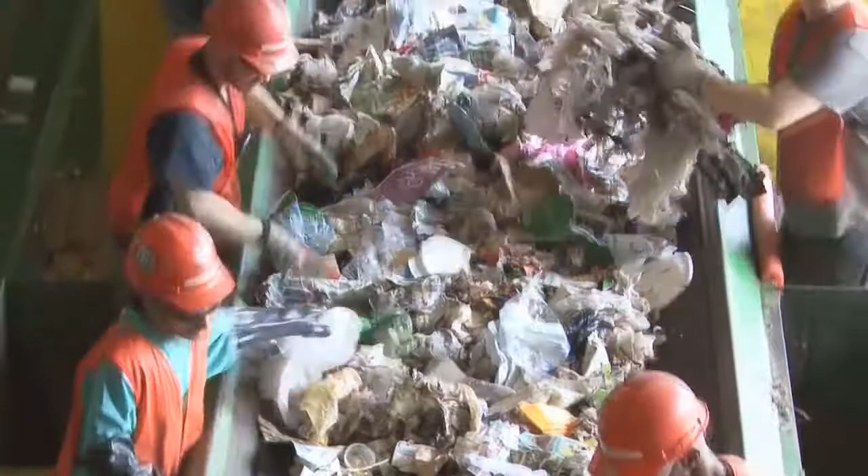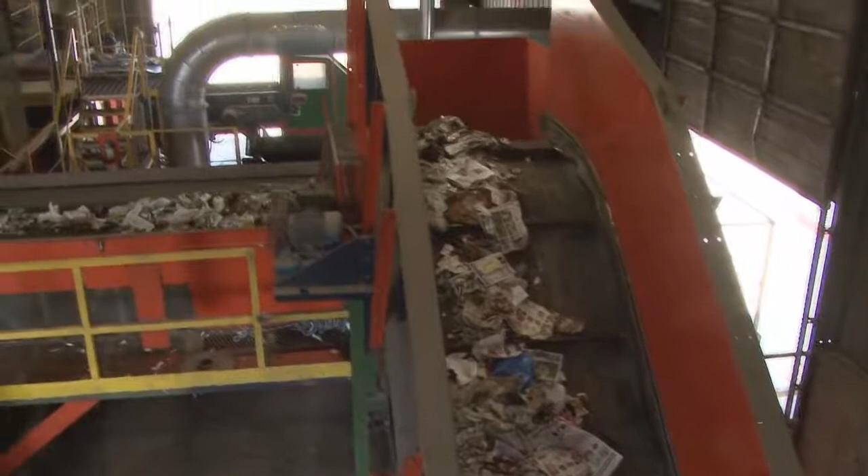The harvesting process begins at the bag shredder, where bags are broken open to expose the potential recyclables inside. In stark contrast to a landfill, the materials don't just sit there, they move. The contents of the bags are quickly moved to the pre-sort line. While traveling down the pre-sort belt, the contents are combed for non-recyclables that may have been contained in the bags, while some employees are tasked to look for obvious recyclables that are dropped into the bins below. The now combed material moves up a conveyor belt to a secondary pre-sort line. On the second pre-sort line, materials are once again looked over for any non-recyclables as well as anything that might damage the machine, such as garden hoses or electric cords.

From here, it enters the trommel. The trommel serves several purposes, including breaking up any large material or bags that have made it this far in the process. And more importantly, this is where smaller fine material and organics are separated from the batch. The smaller materials fall through the small grates in the trommel. The recyclables move onward and upward to the next phase of the process, the cardboard separator. The heavier and larger cardboard is pulled up. The large gaps allow smaller paper, plastic, metal, and glass to fall through to another conveyor belt. The glass, plastic, and metal move on, while the large majority of paper is separated and sent to bale at this fiber screener, which uses an innovative blowing process.

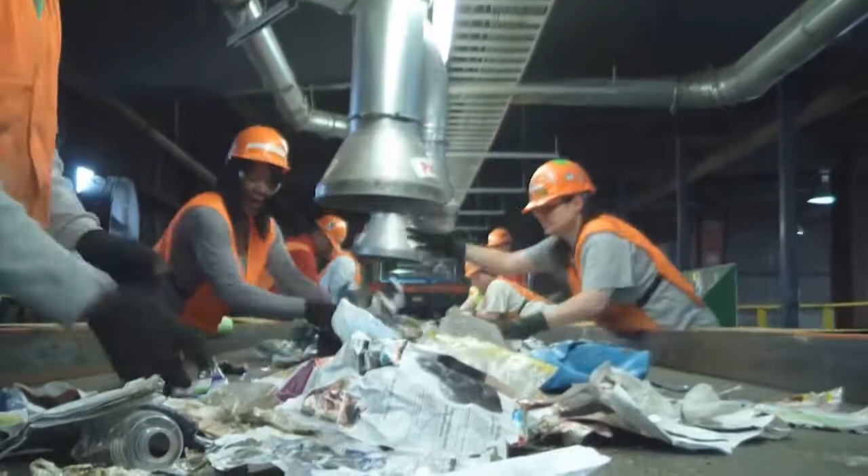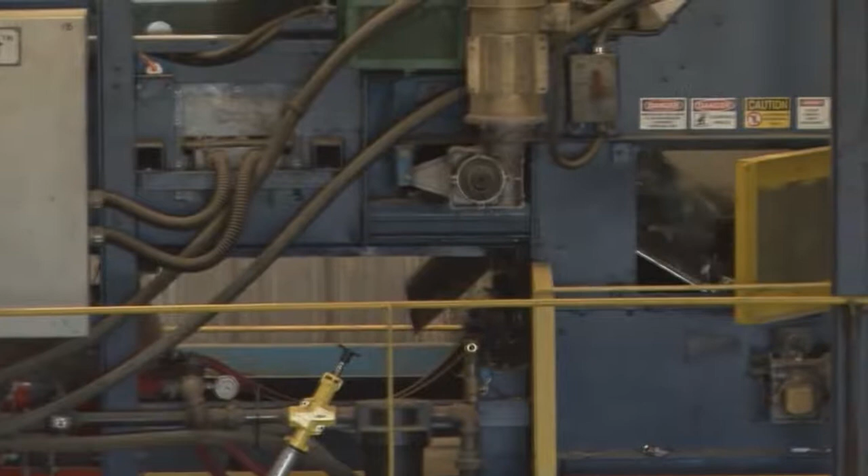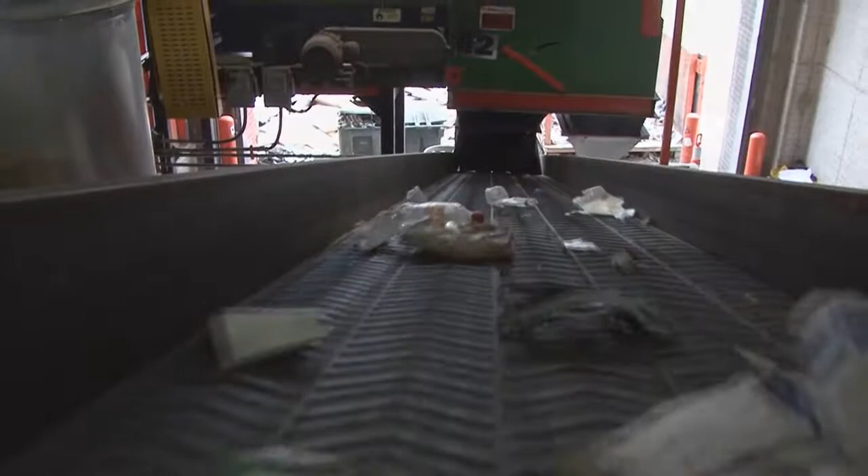The remaining recyclables move up yet another conveyor belt to the sort line. During the first phase of the sort line, plastic bags and paper products are hand separated and placed into vacuum tubes. This complex yet simple vacuum system allows all the materials to end up in their rightful bin. Next comes the ferrous metal magnet. Ferrous metals, or magnetic metals like iron and tin, are separated from the batch in a blink of an eye. The remaining materials move up a small conveyor belt to an optical sorter. This amazing machine within the machine recognizes different types of plastic and separates them at lightning speed. Now all we have left is the aluminum and a little residual. Aluminum is separated by the eddy current machine. This machine makes the aluminum essentially hop over into its proper bin, while the residuals fall onto another conveyor belt to go back through the process once again.

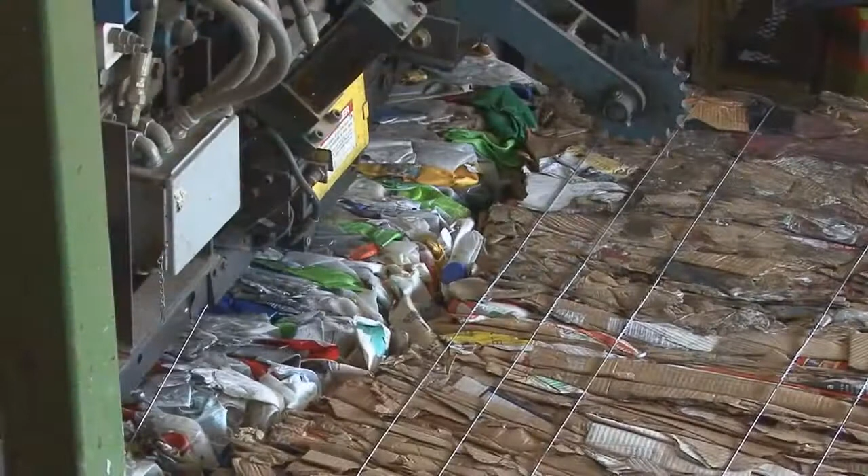So what happens to these materials once separated? When a bin is filled to capacity, such as this plastic bin, the bin is emptied and transported down the line via a large conveyor belt. The contents are moved to the baler, where they are compacted and baled. The entire bin of plastic that would have otherwise ended up in a landfill is now condensed to a relatively small bale. The bales are loaded for transport and sent to the appropriate facility to be repurposed.

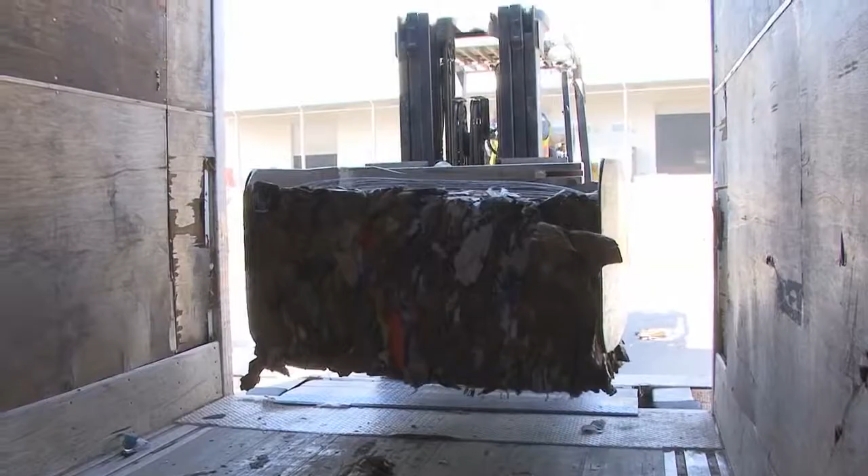The facility is equally proficient at separating both mixed waste and source-separated recyclables, and takes in tons of recyclables that may have otherwise ended up in the landfill. All of this to make the world just a little better place for our future.

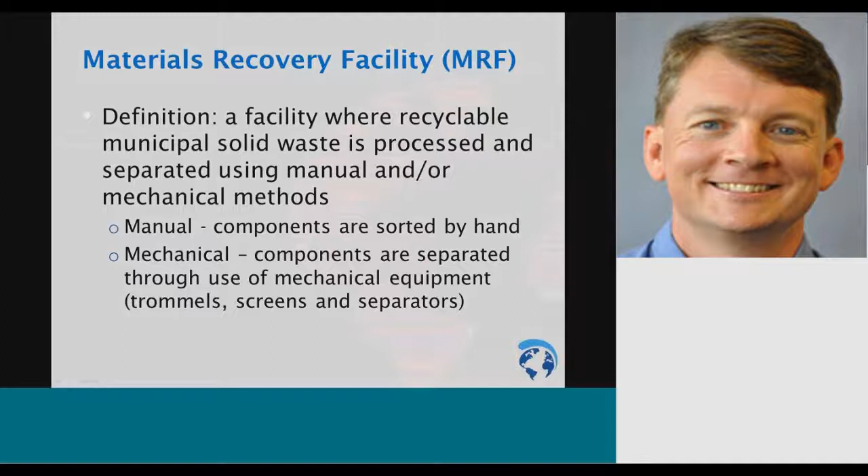The key with manual sorting is that you're trying to pull out the materials that are the easiest to get out. So you're looking for things in that material stream that are not as common. So you're pulling out the smallest number of things, and the largest number of things stay moving through the sort.

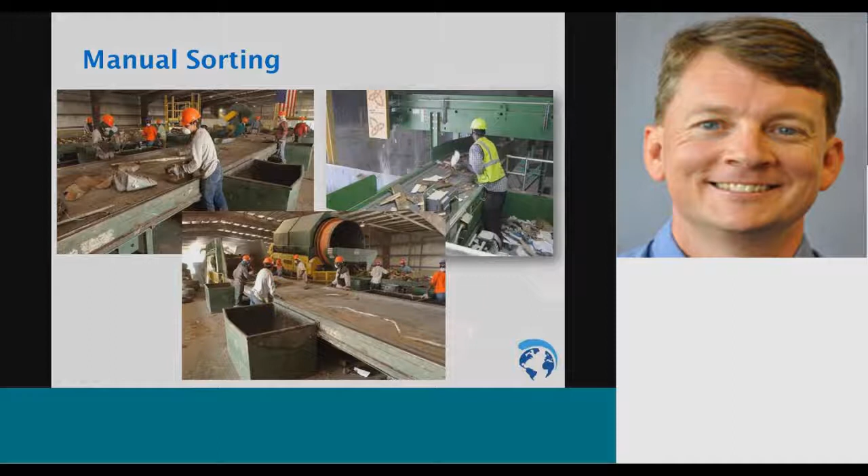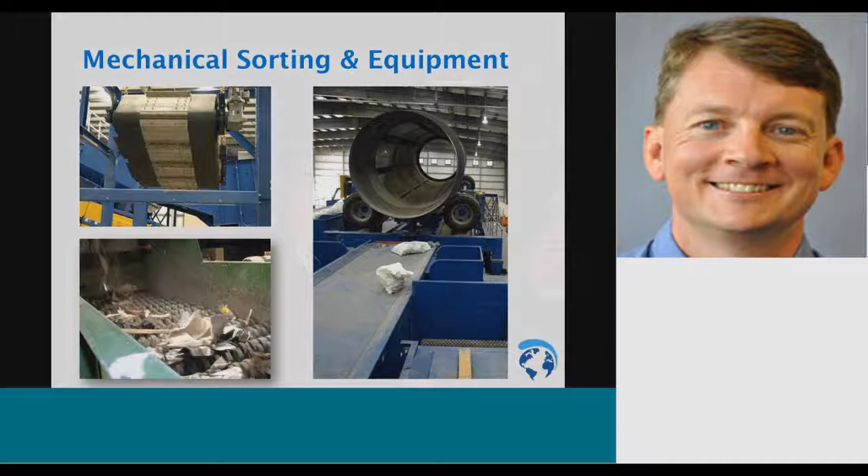And off to the right, we have a trommel, which spins, you can see by the wheels there, it spins the material through it. It has a screen set in it, and it will separate materials by their size. It also helps to open things like bags by tearing them and moving materials around to separate them so that they're easier to pick in subsequent steps through the sorting process.

So MRFs are generally defined as two separate classifications. First is a clean MRF. A clean MRF is commonly used in communities where there's already a high degree of segregation occurring right at the source where materials are being generated. So that's in people's households, in their places of business, at schools, at markets, grocery stores, those types of places where the waste materials are being generated. We're then doing source separation at that location.

In clean MRFs as well, we're typically separately targeting biodegradables versus non-biodegradables, and hopefully those are being separated out in the very beginning of that process. Biodegradables can contaminate the non-biodegradable waste stream, material stream, so we're looking to try and get that segregated out as early as possible in the process, the solid waste management process.

Contrary to clean MRFs, we've got dirty MRFs. In a dirty MRF, nothing is separated at the very beginning of that process. Everything comes together. People throw everything into one bin. All the trash, all recyclables, all go into one bin. It all gets stored in a trash can, is all collected together, and goes to a facility where then the segregation occurs.

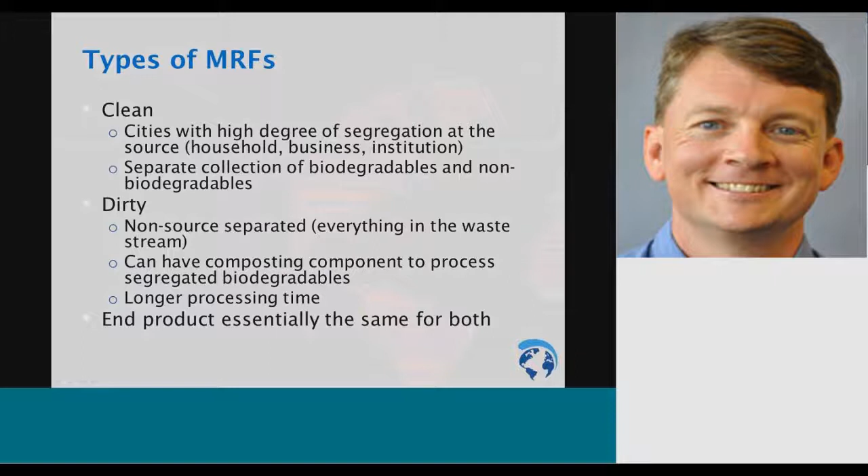So when we're looking to develop our MRF, we've got to find a site for it. So I'm going to talk through some of the siting criteria that we look at when considering the right place to locate a MRF. Certainly, we're building a facility of some sort, where the size may vary depending on the amount of material that we're going to send through it. But generally speaking, for the convenience and the efficiency of moving materials in and out of a facility, it needs to be close to existing roads.

But certain roads are not necessarily compatible with the types of vehicles that will be entering and exiting our MRF. So we're going to want to check on the impacts to existing traffic surrounding the potential location for this facility. Waste trucks bringing materials to this facility are relatively large trucks, 30, 40 feet in length, 10 meters. And waste vehicles and tractor trailers that are taking baled materials and the residuals away from this facility are double that size. So having those large vehicles driving around in, for example, residential areas where small kids are playing and there are schools is not necessarily compatible.

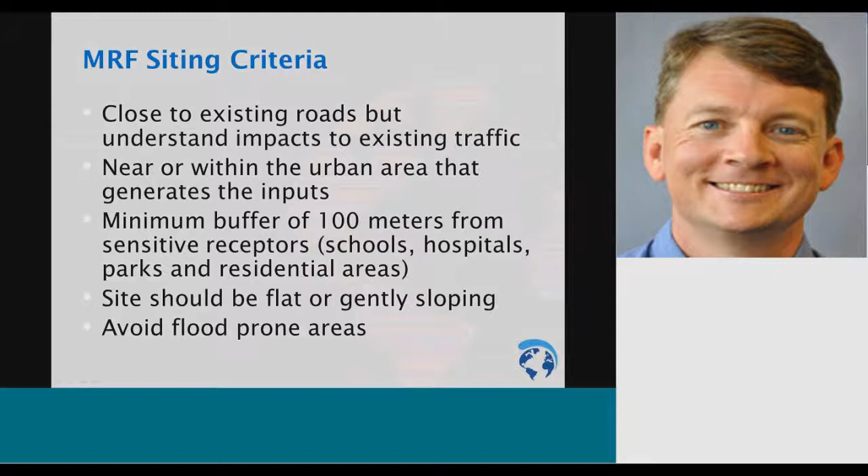So as we're looking to now get into the planning stages beyond just finding a good site, we need to figure out how are we going to design this facility? How are we going to size this facility? And the first step in this overall process is really understanding the nature of the materials that we're going to be dealing with. Where is this material going to be coming from that we plan to be managing and to be separating?

Industrial type facilities, you're going to have more packaging materials. So we may see more plastic wrap, plastic materials showing up in our waste stream, cardboard boxes there as well. And hotels and restaurants, well, we're going to have large plastic bottles and tin cans. Food is typically purchased in large bulk type sizes, so we get large amounts of materials that hold that food. And of course, we're also going to have food waste as well.

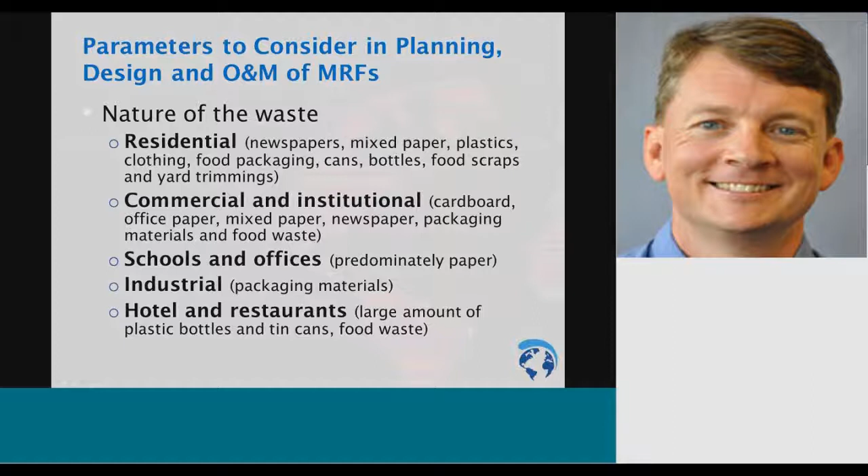So really understanding that waste stream, that generation of waste, where it's coming from, what types of materials, is really important. And so we certainly recommend performing a waste composition study. And the key to a waste composition study is what's termed here as end of pipe waste characterization. We're looking for the amount, the characterization of the waste that gets collected and would be delivered to a materials recovery facility. And we do an evaluation of that waste to find out how much and what types of materials are in that waste stream and are able to be processed, able to be separated from that waste stream and stored and subsequently sent on to recycling markets.

What will come out of all that as well is there's going to be a certain amount of materials that you're going to be able to pull out of that waste stream, but there's a certain amount of materials that you're not going to be able to do anything with. Either the markets don't exist to manage it, or it's contaminated, or it's a material that you just can't do anything with. Those are what are termed as the residuals. And you're going to have to manage those materials as well. Those are going to have to go off to a waste incinerator or go off to a landfill ultimately at the end of your process. So you need to understand the full circle of that waste stream and how it gets managed.

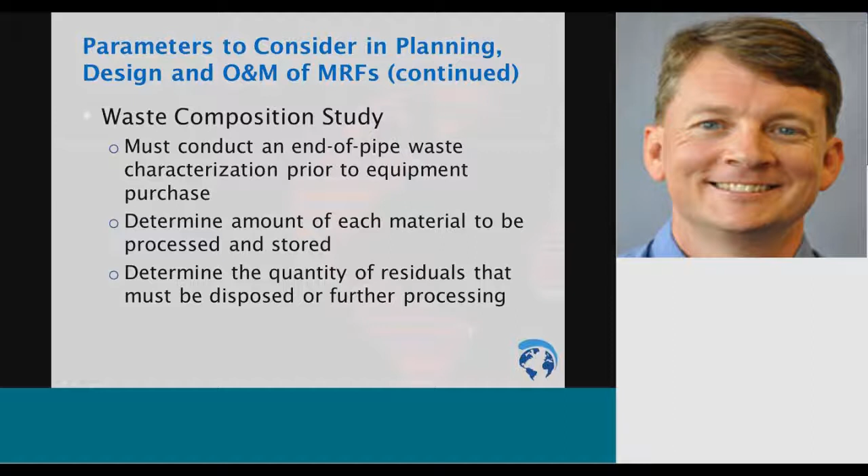If there's construction and demolition debris that you're going to decide to target after, well, the technologies may change on the separation and the labor force that you might use to be able to pull those type of materials out. We've got different concerns with construction and demolition debris.

In the video that I mentioned, the MRF facility was handling municipal solid waste, and they did reference that they had a second facility on that same property. And that second facility actually is a whole separate construction and demolition debris recovery facility.

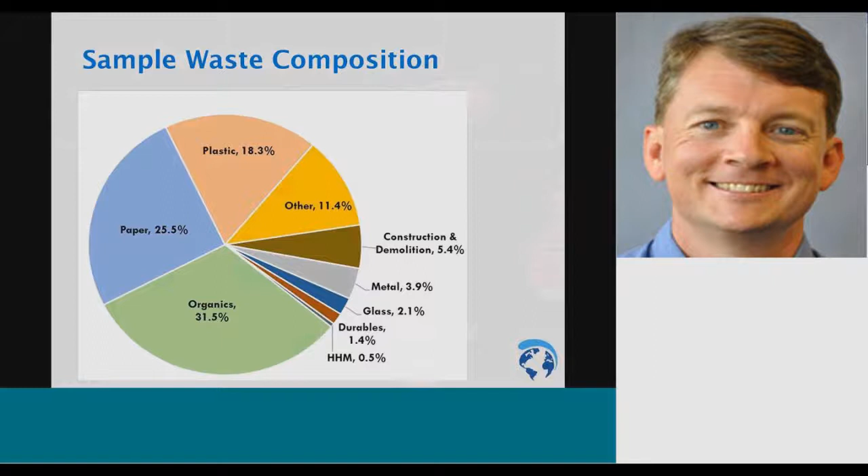So once we look at our waste composition, we understand what types of materials and how many materials are in that waste stream. We then go back into looking at the area that's going to be potentially serviced in a location where we place our materials recovery facility. We go back to what is the waste generation? How much waste can be generated to serve as the source of these recyclables?

If we're going to expect to get 10 tons per day of materials, then our facility will be sized accordingly. If it's going to be less, it may change the technologies that we use, and if it's more, it may significantly change the technologies that we use. So we need to then step out to where is this waste being generated? How much of it do we expect to be coming into these facilities?

This is also important in understanding the amount of materials that will be leaving this facility for secondary markets, so that we can consider what are the economics of our facility, and how much material and what value do we expect to get in the facility as well.

Understanding waste generation, we also project into the future. This facility is not just going to be build it in 1 year, operate it for a year, and let it go away. It's going to be build it in a year, operate it for 10, 20, 30 years perhaps. So you want to understand how the growth in the area that is serviced by this materials recovery facility is going to change. Generally speaking, with an increase in economic activity, generation of waste increases as well.

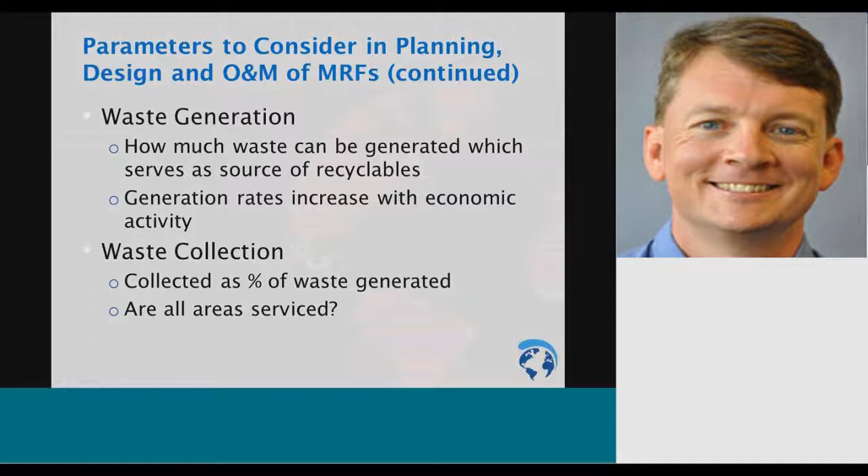As people spread out, it's harder and less efficient to try and get materials collected. We may now depend on people to bring the materials to us. And there's just a certain number of people that you're not going to be able to service. So you need to understand the community that then is serviced by this MRF. And how many areas are we going to be able to service? Are we going to be able to service all of the areas within our waste shed that we're targeting?

So once we understand then how much material we expect to be able to collect, the other key in this is what type of waste diversion may be going on that's going to prevent materials from coming to our facility. And this is where the importance of the end of pipe analysis comes into play when we do our waste composition and all of that, because we are targeting the waste that would be coming to the facility with that end of pipe, as opposed to waste that's getting diverted before it even gets picked up and heads to our facility. And maybe things that happen at a household, for example.

People may segregate out food waste right at their home because they compost it out in their backyard. They use it in their gardens or whatever the case may be, or they're feeding animals with that leftover food. Are people segregating out recyclables ahead of time, where you have clean recyclables, and maybe they're going to a whole separate facility, or they're going to a junkyard?

People are separating out materials and taking them to a junkyard and things like that, and taking care of some of that before it comes to the facility that you're planning to build. So trying to identify what type of waste diversion is occurring before it even hits a truck that heads to your facility is important as well, because you may be able to start to recapture some of that with your facility. And if you target those materials with advertising and all that, you may be able to pick up those materials and add them to your stream of materials that you're handling.

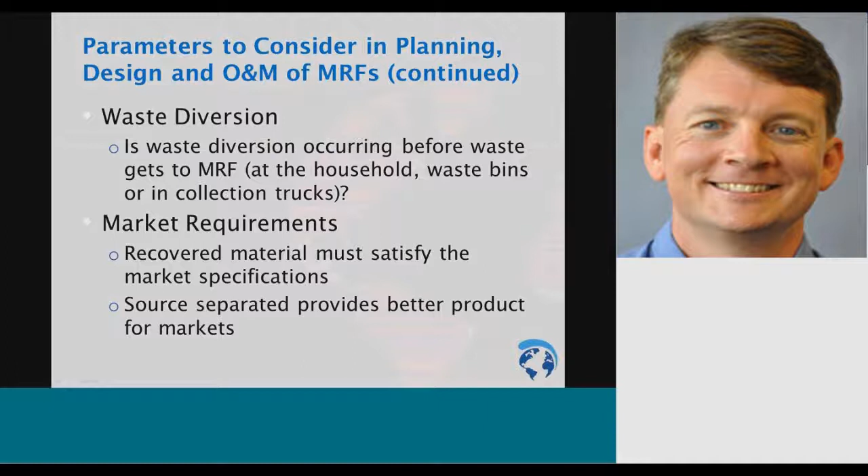And then, of course, the all-important component in developing a MRF is the economics of it all. It's got to make sense. If you're going to spend the money to build a facility, you have to understand that there's going to be a cost associated with buying land, building that facility, operating that facility, but there's value in perhaps getting a tipping fee to have those materials delivered to you, and there's value in selling those recyclables as well. So understanding the prices of recyclables becomes very important, because with the way that the global economy is, materials are moving all over the globe. So understanding what the global economy is doing, and in correlation to that, the demand from the manufacturing sector specifically is going to guide the price of recyclables.

So the market is constantly fluctuating, going up and down. So you may want to design your facility to have extra storage so that in the periods of time when the market for recyclables is low, you can store your materials. And then as the market turns and the value of those recyclables moves up, you can sell your materials to get the most value out of operating your facility.

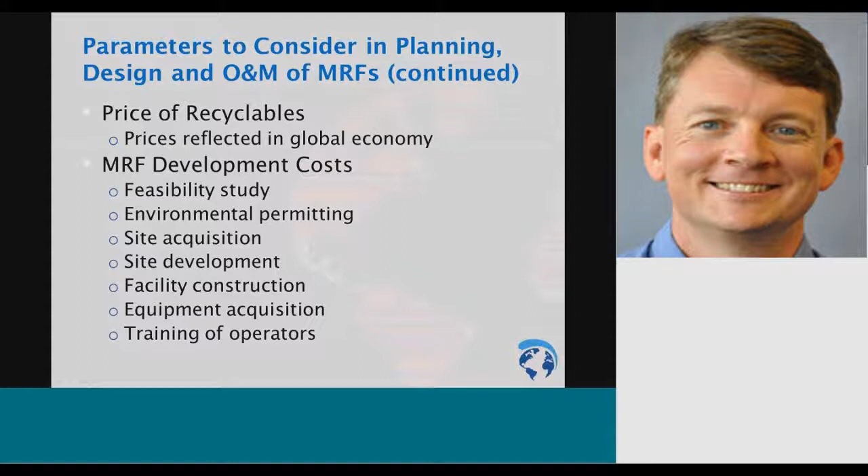So those are all what's called the capital costs. There are development costs. That's what it takes to get the facility up and running. But we've got to keep that facility up and running. And so we've got ongoing operations and maintenance costs for our MRF as well.

And always the number one cost in any type of a facility is employee salaries. We've got to pay people. That's going to be one of the biggest costs. If it's a fully manual facility, maybe we're having lots and lots of people, and so that's going to increase our employee salary costs overall as a result.

We're going to have utility bills. Electricity and water are typically needed to operate these facilities, to operate that equipment, for washdown, and for employee facilities. We need electricity and we need water. We're going to need to buy fuel to operate the mobile equipment that's running around our site. And if we're heating, we need to buy fuel to do that heating as well, whether it be natural gas or fuel oil or something. That may be a possibility as well.

We're going to have to maintain not only our equipment, which is a given, right? We operate equipment, it's got to be maintained, and oil needs to be changed, and tires need to be rotated and purchased and all that, but our facility physically needs to be maintained as well. If a building is not kept clean, then dust will develop, and that can cause a fire hazard. If our site is not maintained litter-free and kept clean, that can attract vectors. It can cause odors. It can cause nuisances with waste materials blowing off property and affecting adjacent neighbors and down the road and all that. So we need to maintain our facility in addition to our equipment.

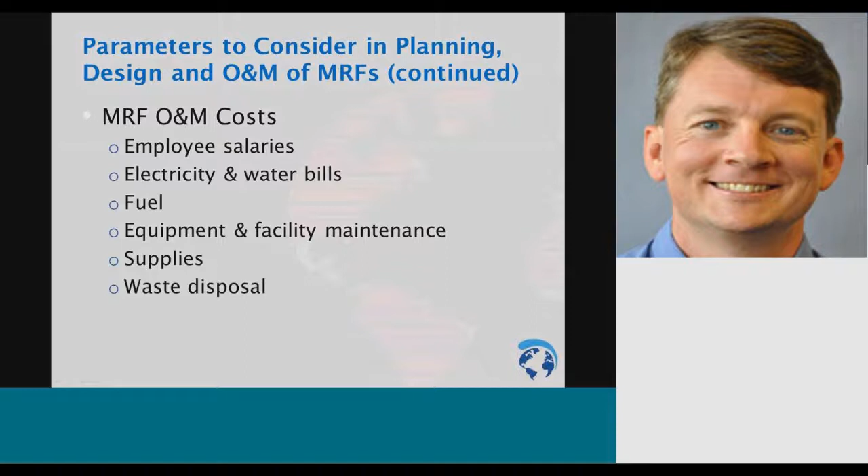So we've kind of gone through the planning of our MRF and the big picture things that go into our MRF and what we've got to think about. So let's talk about the design of this MRF. What components do we put into our MRF? And I'm going to talk through this as the material flows through our facility. So the first step, we've got to have an area to receive the incoming waste. It's called a tipping area. An open piece of floor where trucks will come in and dump the materials so that it can go through the process from there.

And a good rule of thumb is we're hopefully having 2 days worth of floor storage. That can help to accommodate problems in getting materials because of weather-related issues or other issues in getting materials coming to our facility. It also gives us a buffer and we can keep materials coming in. Materials can be continually processed going out if we have this buffer. We run 1, 2, perhaps 3 cycles of employees throughout the day so the materials keep flowing through our facility. So it's good to have at least 2 days worth of storage available in our receiving area.

Right from our receiving area, we go through some sort of an initial sorting and process area. Whether it be something that's done by hand, where certain materials are pulled out, as mentioned, things like batteries or propane tanks, things that we don't want to run through a process line. But this also does include our process line, whatever it may be. It may be as small as a couple of tables and people standing around it, and it may be as big as full conveyor belt systems and all that. So we've got to provide an area depending on the amount and type of processing we're doing. We need to provide area for all of that.

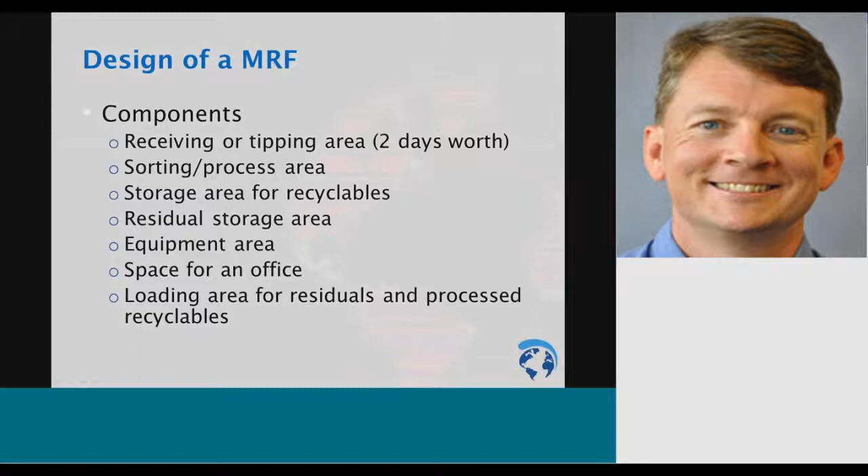Other requirements that come into the design of our MRF: we've got to bring the utilities to this facility, as I mentioned. We've got to have adequate space at the entry and exit of our facility to handle our waste trucks. This is called vehicle queuing. They need space to back up during heavy traffic times so that they're not backing out and causing problems on the roads with traffic.

Because we are dealing with waste, we're going to need to provide provisions for washing of equipment at certain times. The floor will tend to get slippery and tend to start to smell as well. And that material is going to need to wash into either a septic or sewer system as well. So it's another type of utility that typically needs to get developed to our site.

And as I mentioned, the building is typically a warehouse type of design. We minimize the placement of internal columns. We try and keep a clear span building so that the support columns for that building are only around the perimeter as much as possible. And we need high ceilings. We've got large equipment running around managing materials inside our facility. And when we've got those conveyors in our facility, we're going up high heights in order to move materials around to take advantage of gravity in keeping things running efficiently.

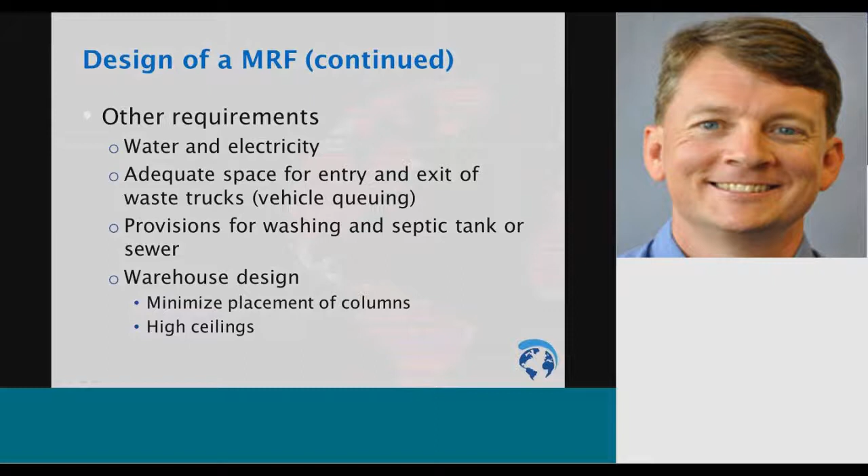So here's a good example, just a simple example of a manual materials recovery facility. So we've got an area where the trucks come in, deposit their materials. In this instance, we've got sorting tables. And then located adjacent to our sorting tables, we've got separate storage areas for the different types of materials that you're going to be targeting: tin, aluminum cans, different metals, paper materials, and plastic bottles. Typically, they're stored unprocessed at this point in time. They've been separated out to their different products, but nothing's been done with them.

Then, once you get an area filled up, it would move to a baler where the materials are baled, and then you need to store the bales so that they can leave the facility. Again, as you can see here, there's a separate area for residual storage.

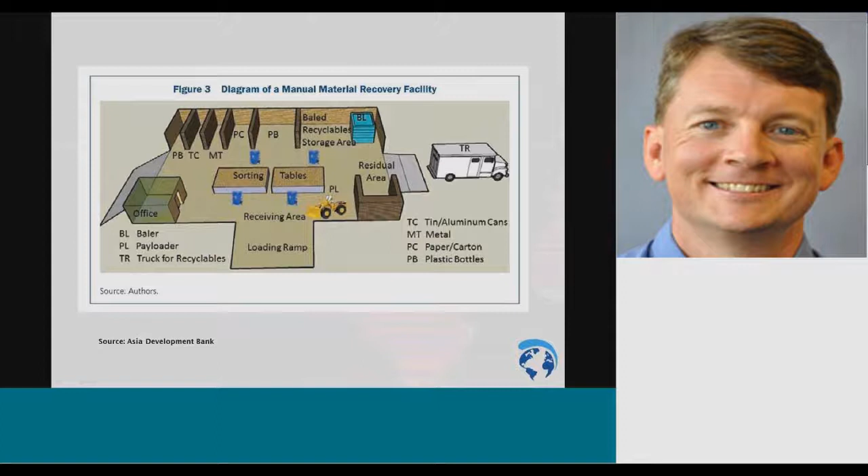A simplified diagram of an automated materials recovery facility. And as you can see here with the colors, the first sort that happens in this diagram is we pull out the papers. So this is done with some of those screens as you saw in the video, plus maybe you have people working in conjunction who are just targeting paper off of this material. So that material is pulled out first. Maybe it's the largest part of the waste stream, so we pull that out first.

Second step in the process is metals. And so there's a magnetic separator perhaps to pull out the ferrous metals, and then maybe there's the eddy current to pull out the aluminum, and that can automatically be pulled out. Maybe there's no manual labor needed there. Next step would be an air classifier that's used to separate out light products like the plastics and all of that.

And then the last portion of all of this might be your residuals. That's what comes off the end of the line. So since residuals may be 75% of the waste stream, we want to leave it on the belt and let it drop off at the end so we're not touching it, we're not managing it. Again, you see separate areas for the different material storage. Material gets baled and it gets loaded out of the facility.

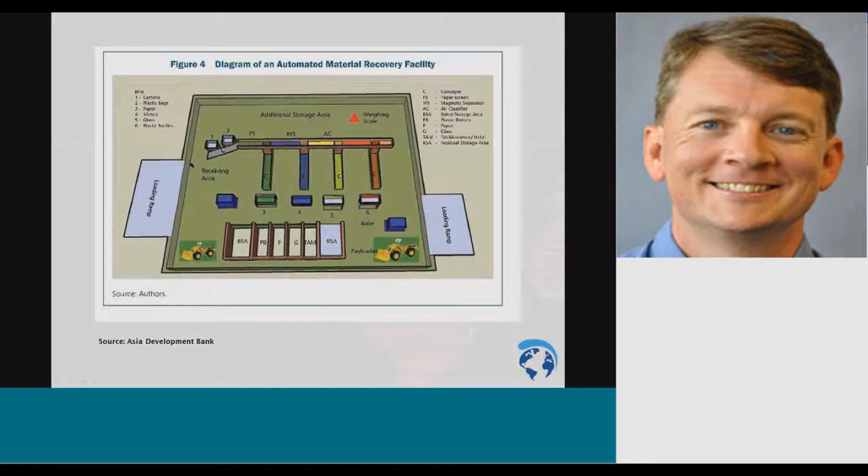So let's talk about some of the equipment that goes into the design of our MRF, the layout of our MRF. Well, first thing starts with the scale. Typically, this is the first thing that people see when they come on site. Typically, we have to weigh the amount of material that's coming into our facility. We then use that scale to weigh out the materials that are leaving our facility. And then we know how much is coming in and what different materials and how much of those different materials are going out.

We've got some sort of sorting that happens. As I mentioned, we may have a sorting table. We may have the conveyors, systems, and all that kind of stuff. Payloader is our mobile equipment that's moving materials around to load into the front end of the sorting equipment, and then to move the segregated recyclables out of their separation area into storage, and then out of storage to a baler, and then from the baler to the load out leaving our facility.

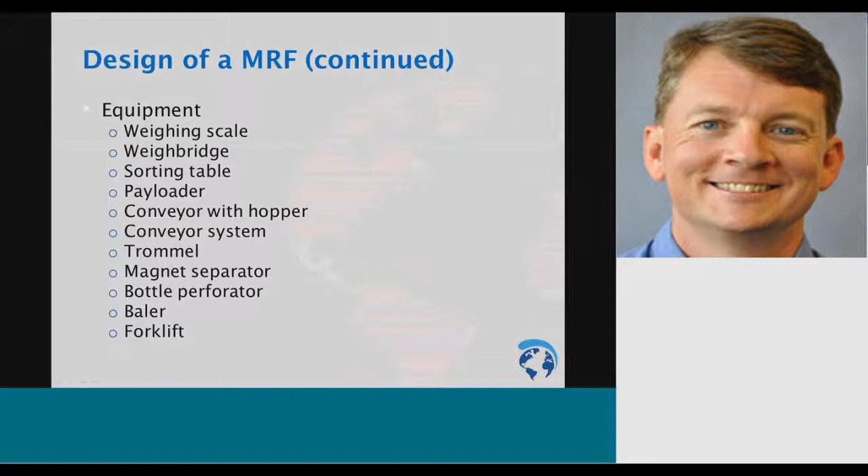And then some of the different types of equipment that are used: conveyors. We use hoppers to help keep waste contained and into our system. As I mentioned, trommels to separate materials by size, and magnets, and all the different types of equipment that we need to consider for our facility.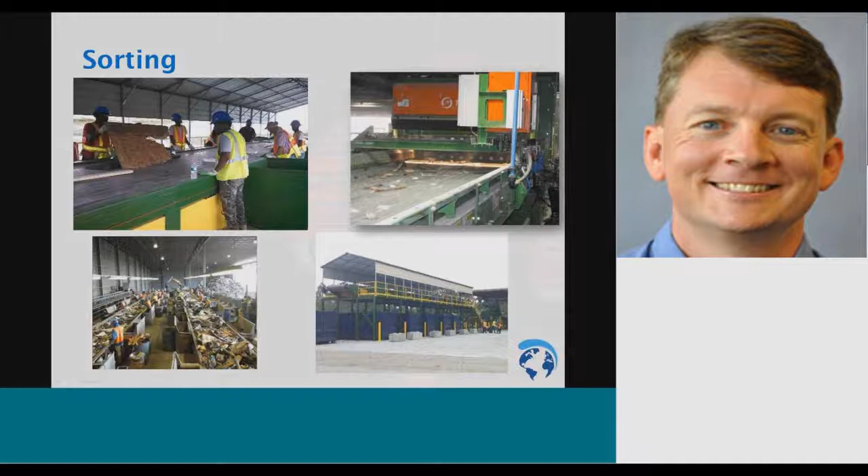And then we've got to get the materials out of our facility. So we have to accommodate the different types of vehicles. Recyclables may leave via a loading dock onto a flatbed trailer or into an enclosed trailer. And residuals going to a landfill perhaps are top loaded. And so we've got to accommodate the different types of loading that may occur at our facility. That runs you through the process of a MRF, how the materials run through, and the general thought process we go through in the development of a MRF.